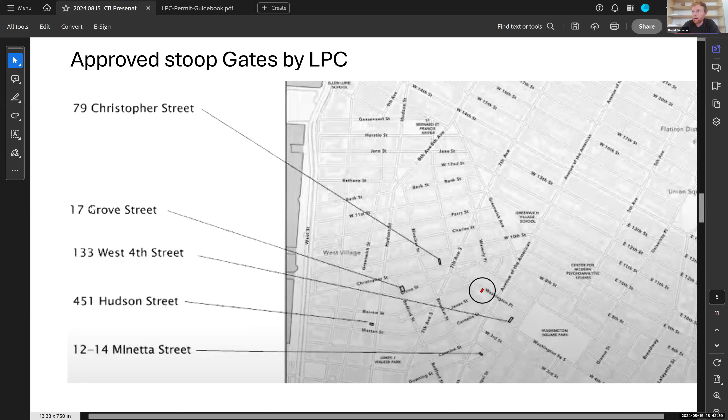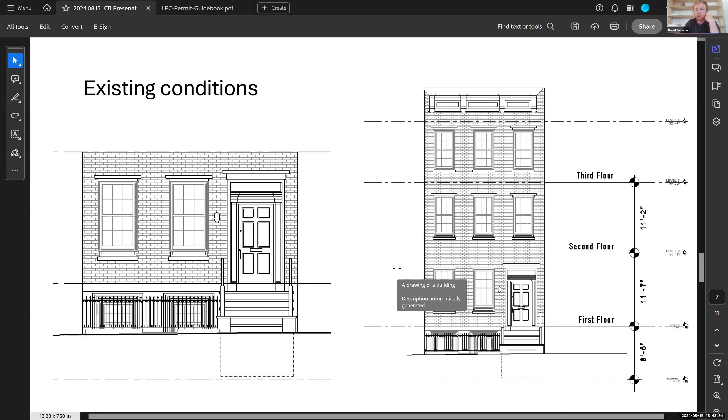Going to next, our existing conditions here, just showing that there are simple window boxes, existing wrought iron fence work protecting the garden level, and then the existing newel post and steps going up to the front door with columns and this transom. So what we're proposing to do is to add a stoop gate that attaches itself to the back of the newel post, recessed as far back as we can from the street, to address some security concerns that we've encountered since starting the project.

And then also proposing just painting the front door a darker color to bring one extra accent color to the project. We want to keep all the window bodies the off-white that we have and all those details, but to differentiate the front door from the stoop and from all the trim colors.

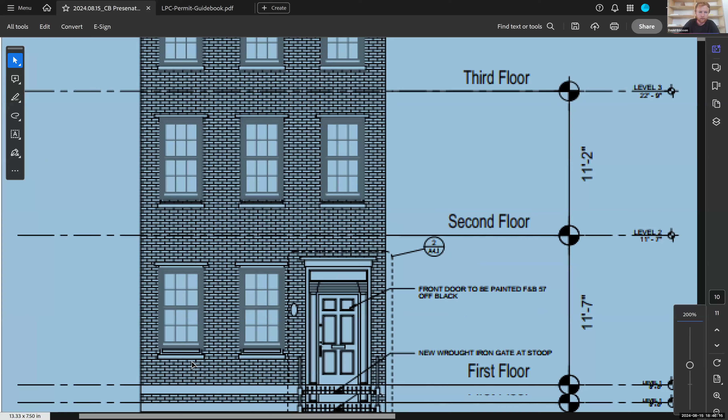This is blurry now, so I don't think it will show up, but I'll pull it up on the photo. Apologies. You can see them down here below these intermediate members. So we wanted to feel as close as we can to the original wrought iron work, but just slightly simplified.

So what you're saying is you're copying the areaway fencing into the gate. Yes, and we're trying to be as deferential to the existing language of the building as possible.

And really this is all stemming from some security issues that we've had at the house since our clients took over and moved in. And I have Tracy Dubb here, and she can speak to her experiences at the house and entering and leaving the house in the thoroughfare from Washington Square Park. Well, you see from the examples, we've had numerous applications that were approved here, and it's well documented. So we will take the security concerns just on the face of the presentation. Thank you.

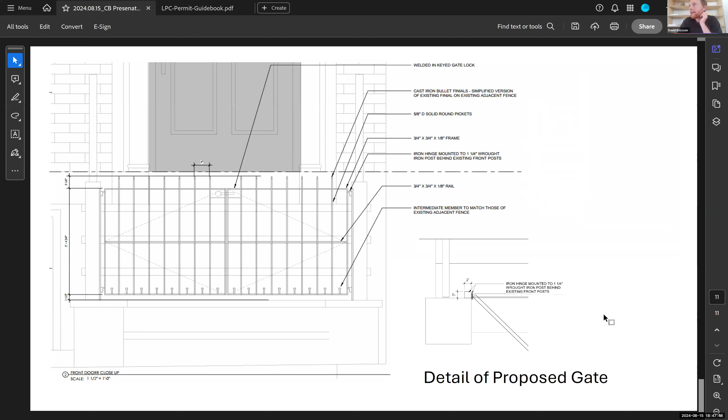Have you completed? Is this a manually operated gate or does it close automatically? We'll put an automatic closer on the back, I think, just for safety.

Could I ask? Are there questions from the committee members? Go ahead, Albert. Yes.

Just curious, the houses on both sides of you, the structures on both sides of you, do they both have fences or do they not have fences? We have fences, and the property on the left has a ground floor entry, but they have a stoop gate. There's a gate on one side of you. Yes, and not on the other. The other is not currently occupied. It was sold recently, but there's not a fence there.

Gate rather, and the door color, are there other doors? Yes, four doors down, there is a dark door on the street.

Okay, thank you. Are there other questions? Yes, how wide is the stoop? The gate itself is 4 feet 6 inches, but the stoop itself is closer to 6.

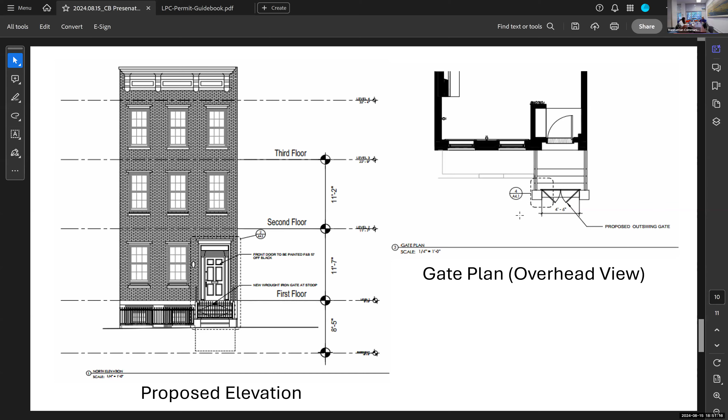I have one. Initially, until I got to page 9, it was hard to picture or even think of the gate starting at the second step. But now I see with the way that column or half column treatment is there, that makes a lot more logical sense. Is there a wide gap underneath there? I know with the perspective, it's hard to tell underneath the gate.

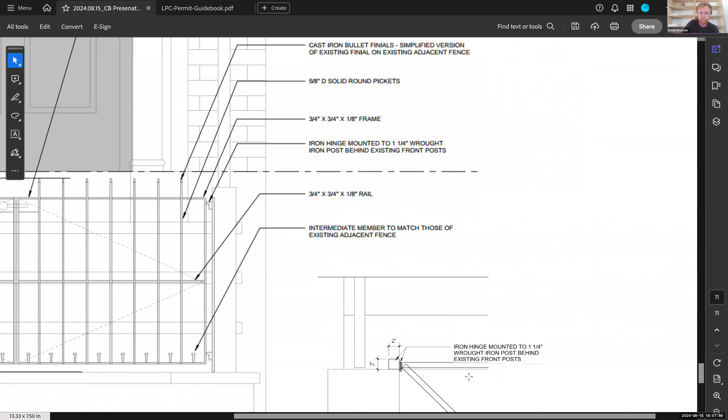We have a small gap, it's more in the order of, we're looking for like an inch. Okay, inch and a half. Okay, thank you.

Valerie, do you have anyone else who wishes to speak? I have no one in the room that wishes to speak, but if anyone online wishes to speak on this, they should raise their hands.

We fully understand, and this block in particular gets more traffic than most people think. I look forward to the day that we could take the gate down, trust me. Thank you. Are there other questions, comments? Not in the room. Online, I don't know.

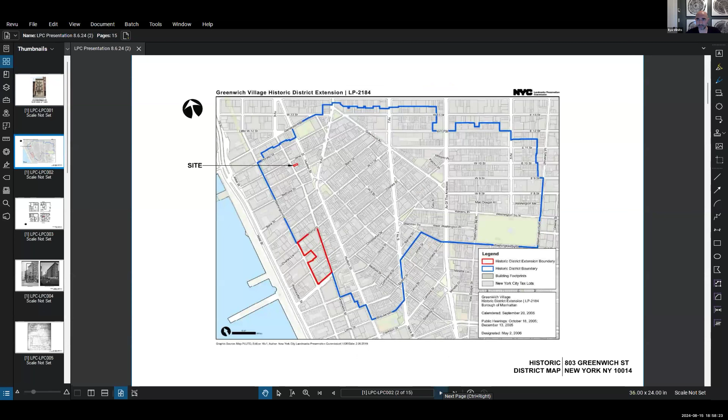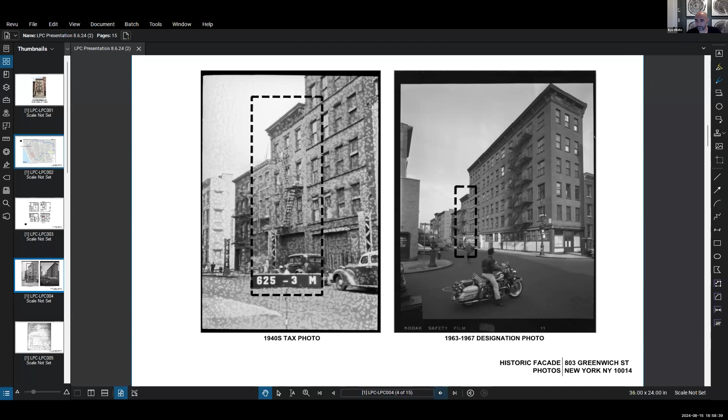It's located in the Greenwich Village Historic District. Here is the site, on Greenwich Street between Jane Street and West 12th Street. This is the historic tax photo, and this is a historic elevation I uncovered during my research. You can see it's two swing doors with a central garage door divided by two piers.

So this is the proposed garage door front elevation. The doors themselves were a staff level approval. So what we're really here for is the cladding of these four piers, to provide a stucco brownstone coating to those piers.

Historically those piers are brick, but as you can see from the existing conditions, the brick piers were covered with stucco, and it's very difficult to remove this stucco without damaging the underlying brick. So it's very difficult to restore these existing piers to brick. We think it's appropriate to instead clad them with a stucco brownstone finish.

I'll go through some examples in the district where that's common. Other things that are staff level approval as part of this present restoration are removing the paint from the masonry, repairing the sills and headers, and repairing the cornice. But that's staff level.

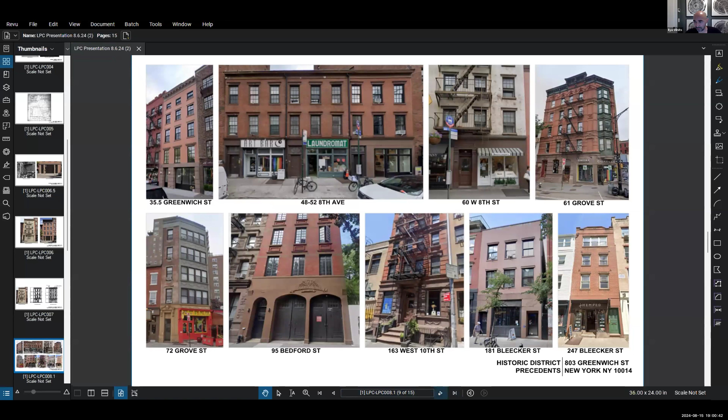And this is the existing photos with the existing technical drawings and elevations. Throughout the district, commercial buildings of similar age and style have many examples of brick buildings with a brownstone base. Here are some addresses, and a few more examples in the district. So it's a very common phenomenon throughout the district.

At the rear of the building, because of the layout of the third floor, we would like to change the orientation of these three windows to two windows. And because of the way we're filing this building, it has to comply with the most recent code.

We have to put in a structural moment frame at the rear of the building, which creates I-beams in line with the masonry. For that reason, there has to be a protrusion from the existing wall to create the waterproofing and insulation we need to cover this moment frame.

So we would like to propose a fiber cement panel, painted black, to create a frame that covers the structural frame we need to install in this building for DOB code.

And then the last component of this rear facade is a small balcony coming off the third floor, about 18 inches deep, for privacy. This will get planted, and the plants will serve as a privacy screen for the bedroom windows.

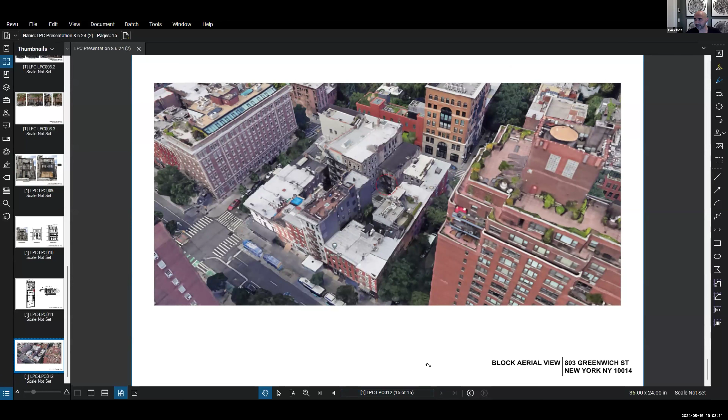The balcony I had thought was to be considered. Is that not the case? It is, yes, the balcony is part of the presentation. And yes, it's metal painted black.

In the front, if you go back to that rendering, is there detailing in the garage door? Yeah, so the garage door is a staff level item, and the profiles and shop drawings will be reviewed with a staff member to make sure the proportions are appropriate.

Okay, so what we have is the piers, the rear covering for the frame, and the balcony, and the alteration of the masonry windows from 3 to 2. Oh yes, I'll combine that in with the other. Okay, that's fine, thank you.

Are there other questions or anything that needs to be added? Bo has his hand raised.

Hi, Bernard, I'm just wondering, on the front facade the applicant referenced 4 piers, and to me the old one only looks like 3, but it may be... there's a fourth one to the right. I think that's the one, it blends with the building next door. Perhaps that's why. Well, no, if you look at it on the left, just look starting on that. Go ahead, the applicant will explain it.

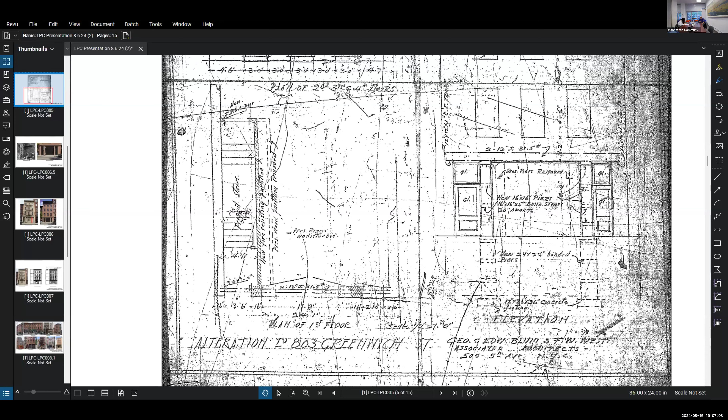Yeah, so we're really following the historic documents. Here you can see that the left door is 3'6" and the right door is 2'10". So there is a historic unbalance that we're, to be true to the original design, recreating.

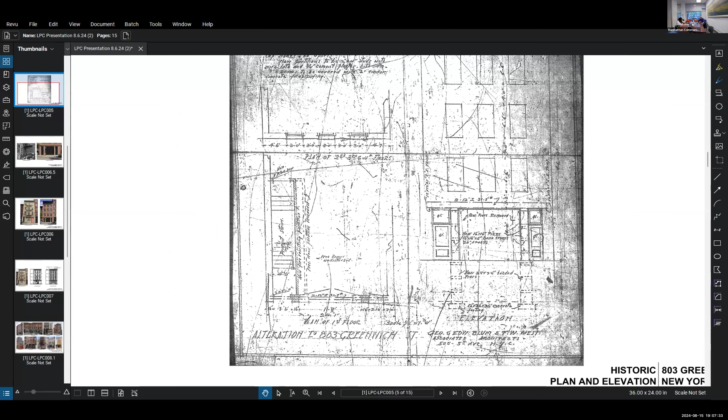Well, is that the original construction drawings for the original townhouse? It is. That's not a modification that occurred when it was converted to some industrial use? I would have to get back to you on that, but this is 1927. It may have been. Yeah, that was built before that, I'm sure.

But even from the historic photos, it's hard to tell. But short of any other documents, I think this document here is kind of our guidepost. And programmatically it works for the building, where the main entrance is located here, and this is more of a secondary entrance in the plan.

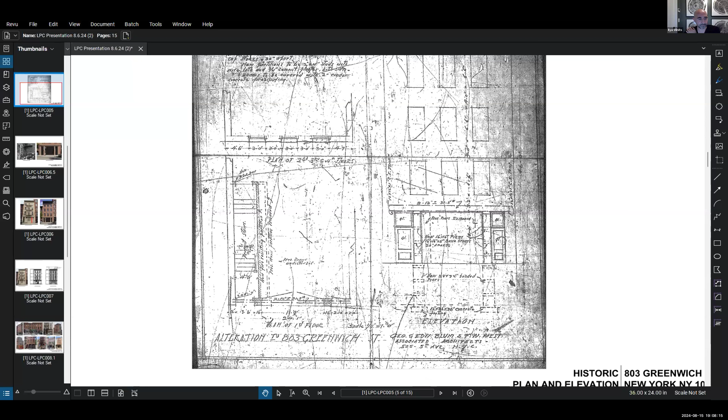Yeah, I just would not consider it to be original to the building, and it's all previous to designation anyway. It's just got a real cattywampus look to it, and it's very off-putting. And then on the back, the rear elevation and the facade, can you show a detailed section of the balconies?

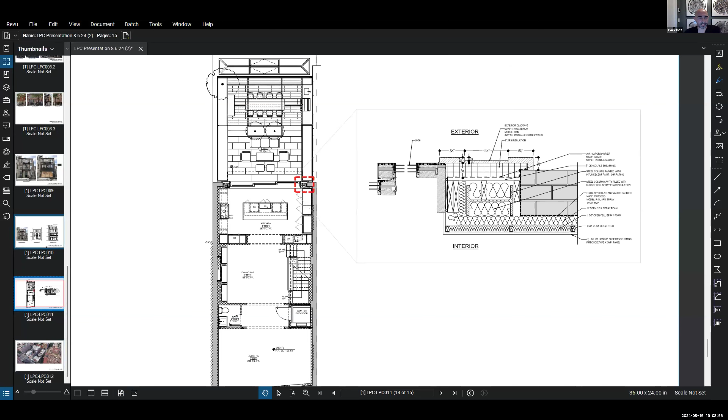Is this the drawing, or would you like the elevation? Vertical section through the building wall. Unfortunately I don't have that plan here with me. Then do you have a plan that shows how far out it projects and what's on the balcony?

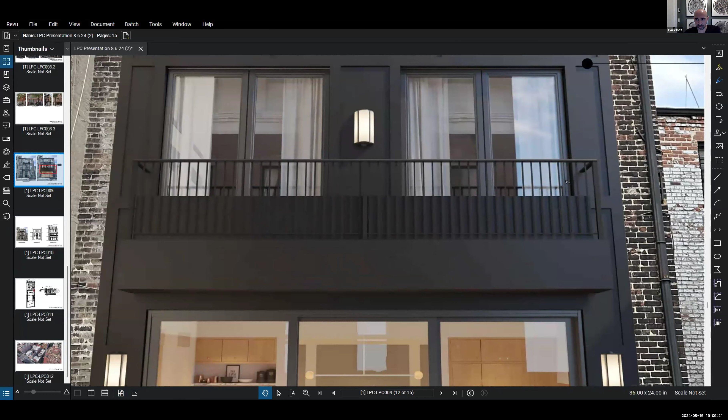It projects to this dashed line, about 18 inches. The balcony will have a black metal railing and a planter, infilled with plants to create privacy for the bedrooms. Because this building is in a very public location with tenement style buildings nearby, with sight lines directly to the rear of the building, so we're trying to provide privacy for the bedroom portion of this facade.

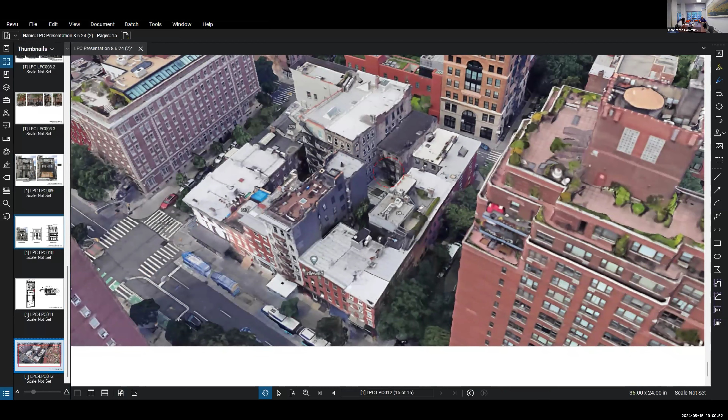So is the top floor fire escape required by code? The fire escape is actually being removed. Removed? The fire escape is being removed. Right now it's a 3-family building.

So I said the top floor balcony is still in your proposed rendering. This is just a photo montage over an existing photo, but if I go to my elevations, you'll see that it's no longer part of the scope here. Thank you.

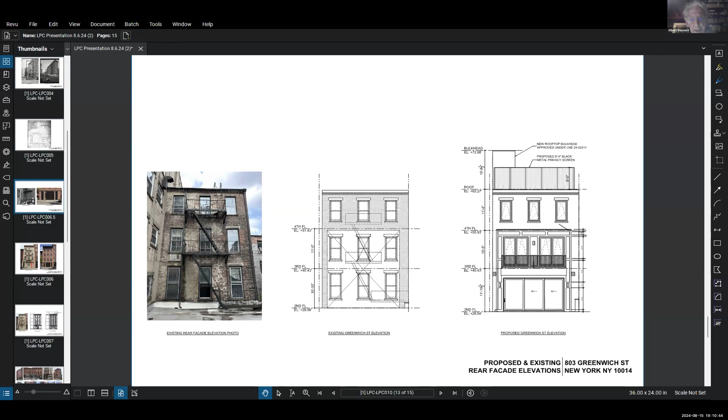The designation photo and another photo, considerably earlier, show that it was a carting company there, with a very wide door, maybe for 2 carts. Do you know when that was converted to what appears to be residential? Unfortunately I don't, after the landmark designation in '69.

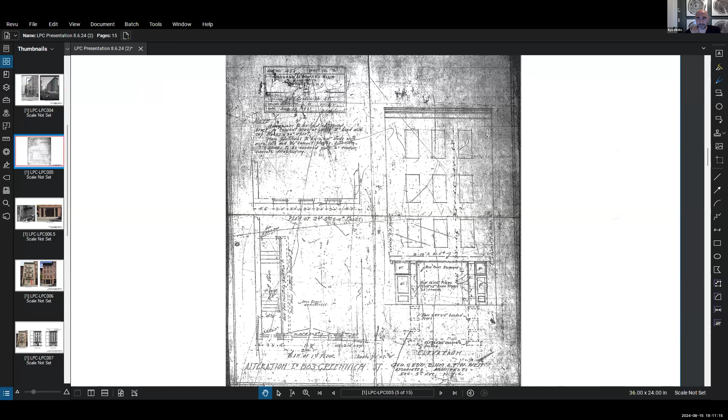The building itself? I'm talking about the ground floor, which is our responsibility. I'm sorry, can you repeat your question? When was it converted? I believe the next iteration is residential with a smaller, considerably smaller door than in the designation photo, and in an earlier one from the 40s.

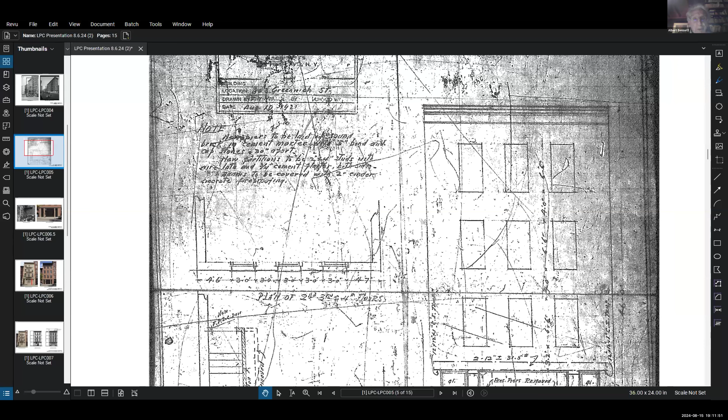This drawing dates to 1921, and it shows the proposed condition in 1921. Oh, that's long before designation, yes. And unfortunately I can't read it.

So Landmarks did obviously approve the zoning change. Yeah, they're approving the change of use. They actually approved the installation of the pier. We're just here trying to get permission to clad the pier in a brownstone finish. All right, okay.

Valerie, I have a question when everyone else is done. Oh, so Bo still has one. I have one as well. Oh, you want me to go?

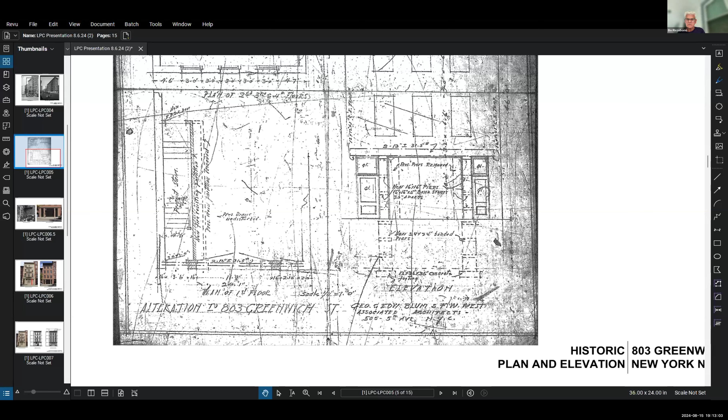Sure, can we go back to the front elevation again? What I'm bothered by is, and I mean this is my own prejudice, I look at the old photo and I find that interesting. I understand you have your uses in mind, and apparently your new proposal serves that function. But it seems to me you could do that without, you haven't referenced the original look of this facade with your proposal.

It's very banal and modern and not at all interesting, and I think it could be. Just because it's new doesn't mean it has to be boring. I think you could do a little more with that. I'm just not happy with what you're producing there, and I think you could accomplish your purpose with something that looks a little better and references the old building a little bit better.

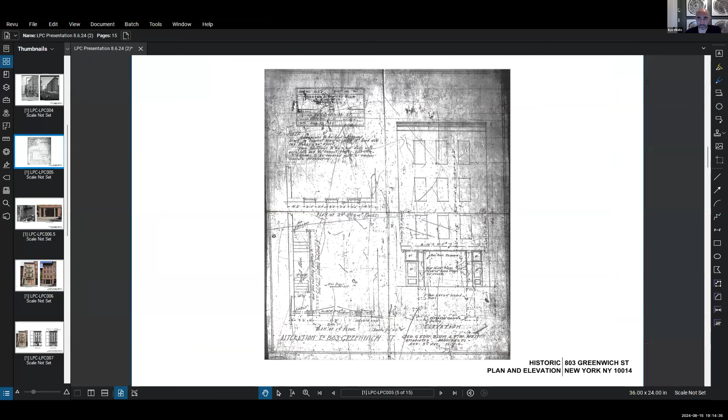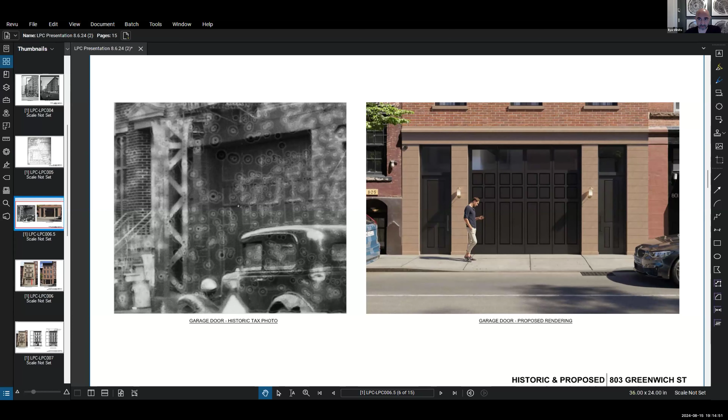We really have been using historic documents to create this design. There's nothing here that's not informed by history. We've either been pulling information from this historic drawing from the 1920s, and we've been pulling information from a damaged 1940s tax photo of what the garage door used to look like. So there's really no artistic liberties being taken here. We're using historic documentation as much as possible.

Well, I don't accept that. I mean, you just look at it. I don't disagree that you're probably using the historic dimensions and all of that as you find them, and that's fine. But you look at them side by side, and they look like they're on another planet. How could you not agree with that? Maybe it's just the quality of the rendering that you're responding to.

But at the end of the day, there's going to be more three-dimensionality in this door, and it's going to match the profiles found in the existing garage door. We've had a clear explanation of this, so we can consider it in the business session. Okay, all right, fine, fine.

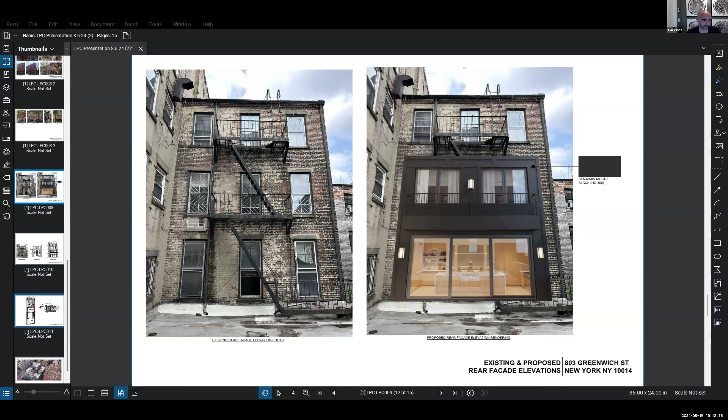Correct. And partly what's driving the frame here is the fact that this building, because of the amount of work we're performing, our structural system has to conform to that of a new building, which means we need to install a moment frame structural system that helps the building with lateral support. Oh wow, but all that was clear from the presentation. The question is what it looks like. Correct, it's a big black two-story back building addition that has no reference to the building itself or to any historic kind of anything.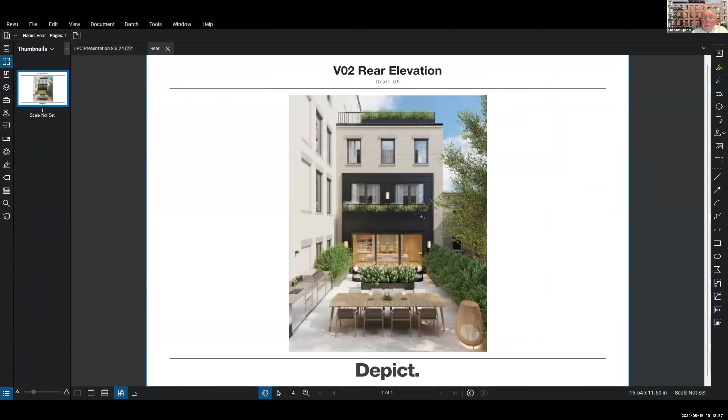It's a question of the material or the color actually. The other thing not illustrated here is that there's a staff level approval pending for painting this brick. So we're talking about the black addition -- correct, so this is the finished product after this brick gets painted. I chose to include this image just because I wanted everybody to focus on the item we're discussing, but maybe it helps to look at it in context with the final painted masonry.

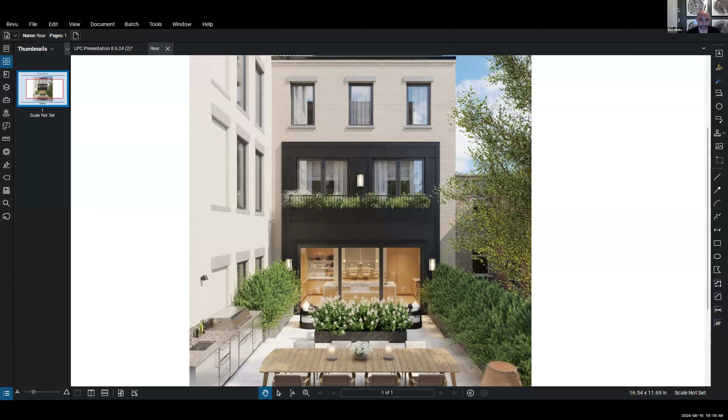This was why the black is appropriate -- it's meant to reference a bay window that projects from typical brownstones of this age. Sorry, I don't think you understand, the question is why is it black in color? That's a color we thought was a nice design element for matching the windows and a strong central feature of the rear facade.

Okay, but that's the fine answer. Thank you. Are there other questions or comments? Yeah, I have one, I've been waiting. On page 7...

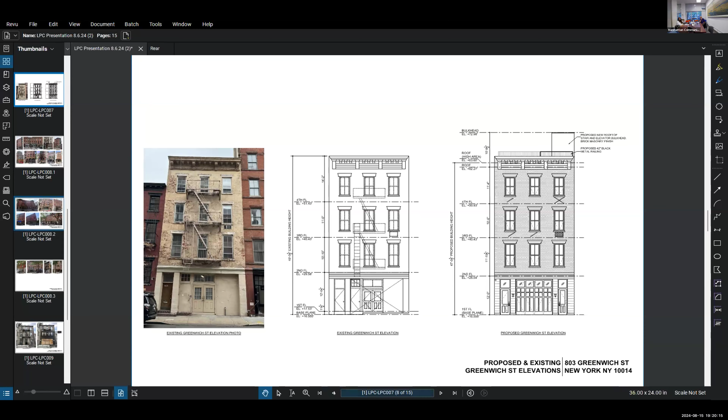With the side by side of the front facade -- or is it my page 7? Am I reading it wrong in terms of the scale of the top? When I look at the drawings, there seems to be no change to the top of the building, but one reads a lot heavier, even though the space looks the same. Is it just -- what's going on there? There's no change.

It's probably just the way the camera and the rendering is set up. You're trying to drop a computer image in a photo and sometimes it doesn't go -- it just looks a lot heavier at the top with the black. The cornice is not going to be as big as it's probably rendered. We're going to just be repairing the existing cornice. There's no new cornice.

Okay, how do we stand, Valerie? Is there anyone from the public? I don't know if Bo still has his hand up from before. We have two from the public, but Bo, did you have another? Yeah, I'm okay, I'm sorry. Okay, take it, that's all right.

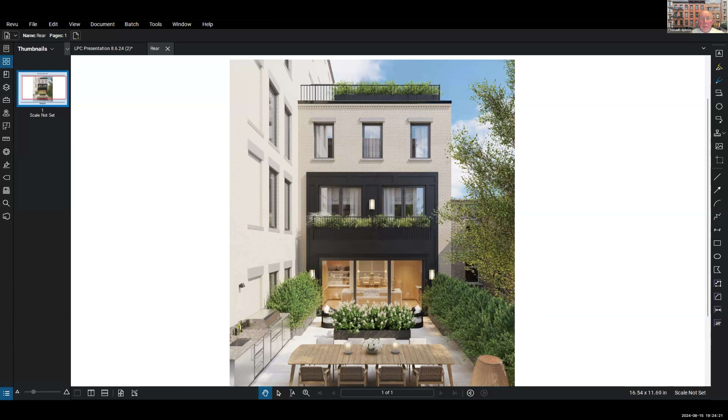Any more, Valerie? Nope. That's it. Okay, if that's it, could we move back to the room and have the business session? Okay.

I'm sorry, the sound is just strange. You sounded like a member of the public who speaks frequently, Brian. Oh.

Let's do the first one first. Is there objection to the gate? Well, generally speaking, I would say I object to gates on stoops. Right, I do, and we're stuck with them. So you don't vote against the resolution to approve it, I assume.

Now that we have clear what's before us, I know that we want to deal with other things, but let's deal with these specific things, and then separately we'll comment. It just seems to me impossible that so much of this has been approved by staff, which is not the fault of the applicant, but it's just far reaching beyond what was ever envisioned for staff to do.

So, the covering of the pier in stucco to represent brownstone, is there any objection to that? If we are limited to that wording and that sort of a vote, I don't have an objection. But I agree we should be opining on everything else.